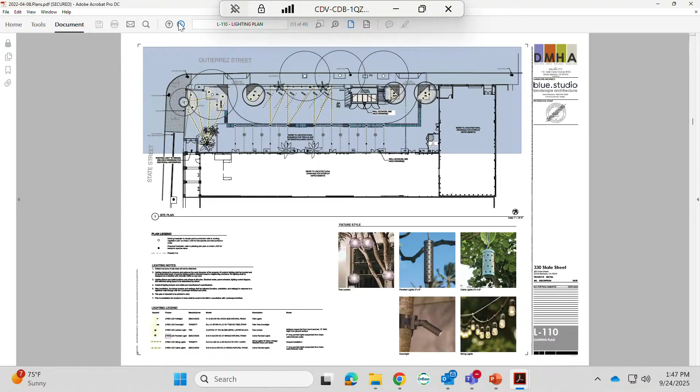I don't know where it is in the set exactly because it's not my set of plans. Keep going. Too bad. Keep mine going. Right here, I think. Let's see, I think there's a landscape plan, if I remember right. There is.

Go. There. This is probably helpful. Let me zoom in there. I don't have a pointer, do I? I don't have any way to. No, I have no control.

An arm wave, okay, over there and over there. I'll do this starting from right to left because that's how I talk about this project a lot. So the right side building where it L's north-south, that previous use was intended to be a music venue and concert, a small little concert hall. The gray area under the hand was the stage, and then the rest of it was just an open area.

Moving right to left, the space that has the red text in it was going to be a speakeasy. And then those other areas around them, surrounding them, are restrooms with the little circles in them. Those are restrooms there too. And then the whole left side of the building, the remaining part of the building, was intended to be one large restaurant.

Our uses are more or less the same, with the caveat that the restaurant space we've cut into a smaller restaurant and a small market. So other than that, we're not really doing a speakeasy, we're calling it a piano lounge, but it's still a bar use. And the music venue is still a music venue use. We just have flipped the stage around to the other side and done some other changes.

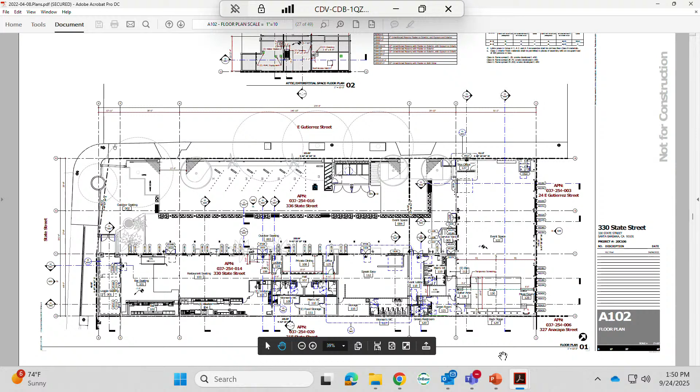Our approach to the project is very different in terms of site planning. The use of the building, doors and windows, and all that, we're making some mild changes to them, but for the most part, the uses haven't changed.

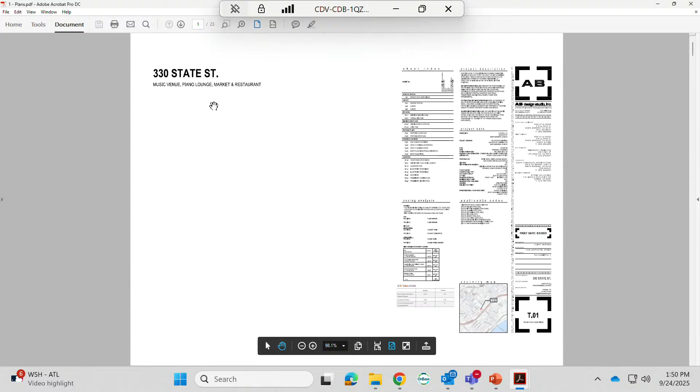Does that help? Yep, that helps a lot. Okay, perfect. We'll go to our presentation and jump in. So we can go to the next page, please.

The whole structure, the whole property is historic, but they're separate parcels. Our property is actually two separate parcels: one that holds the building and one that holds the parking lot, effectively. The tower's there. We're not doing anything with the tower, it's going to remain.

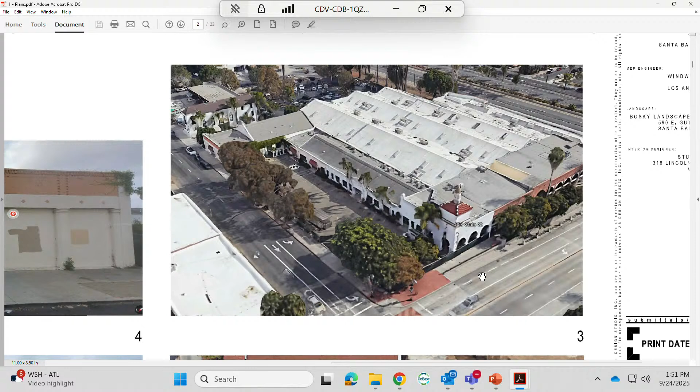The image in the middle, image number 4, is the facade along Gutierrez Street, and it looks like that today, pretty much. We've been working with Nicole quite a bit on trying to figure out what we can do with that facade, because we all know it needs to be improved. The program right behind it is the green room, the loading in and out for the shows, so it's more of a utility side of the building, but it's on the street front. Nicole and our team have been working to try to give it some more life. We'll see that in the elevations later.

So here's the middle of the building, if you will, the long facade. Those are all original steel windows that you're seeing. There's been some newer replacement things that have happened, especially under that gabled entrance that's been set back - that's not historic material, it's just sitting there today. But the windows to the right and left of it are all historic steel windows, which we intend to keep.

In some areas, we're removing a window and putting in a door or something like that, just to get in and out of the building for egress and other reasons.

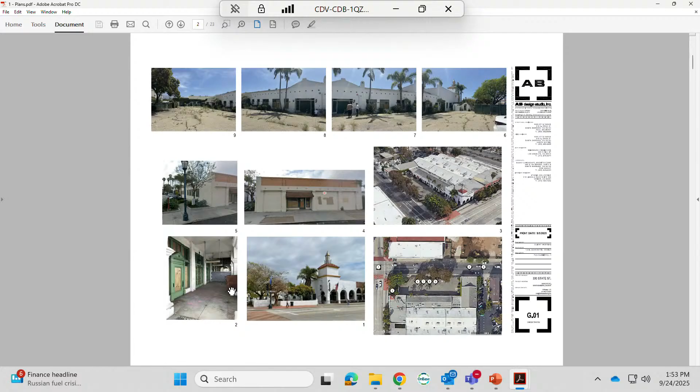Here's our proposed site plan. I'm not going to get into the site plan too much - I'm going to let Graham handle that. But the plan that we're starting with, which is why it's very different from the last go-around, is that we're removing all the parking and trying to create a park-like setting on the corner of State and Gutierrez. So remove the cars, let the building flow in and out, let there be space to sit around the site and enjoy things. Similar to how Dark Garden is in the Funk Zone is our sort of inspiration for it, although it doesn't look like Dark Garden. We'll let Graham come back and give us more detail on that.

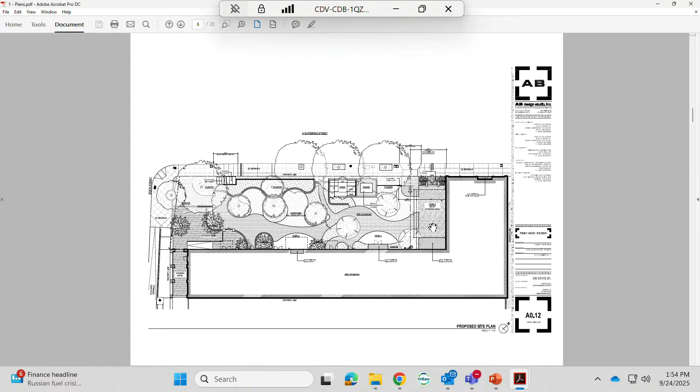It's really hard to do without being able to point, but in the corner of the L on the site plan, in the upper area where there's that gray area that says 228 square foot addition - that's the entrance or foyer for the music venue, and that's where we're doing a small addition. Next to that on the left is also a small addition to the building for the piano entry. They're sort of like control points, so that as people are coming in, they have people greeting them, controlling, and telling them where to go.

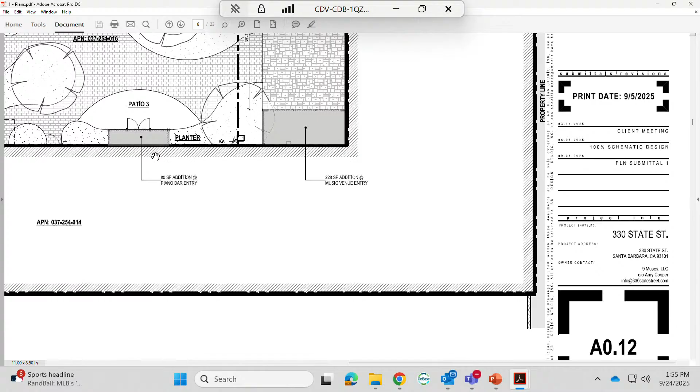If you slide to the left, there's a small addition where that image I showed you - that had the doors that had been changed out - has an alcove in it. We're pulling that back out. That's going to be the entrance to the market, and there'll be a little canopy above that, shown as a dash line. We'll see that on the elevations.

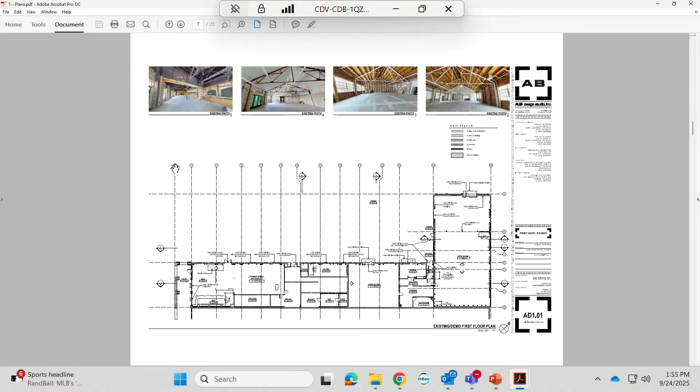I just wanted to point out those in plan.

If we zoom in that same area where the piano lounge is and that L - thanks. So there's the entry pop-out that we have on those two entry points to help control flow. We have a music venue specialist we're working with, and they've been giving us a lot of direction on these things.

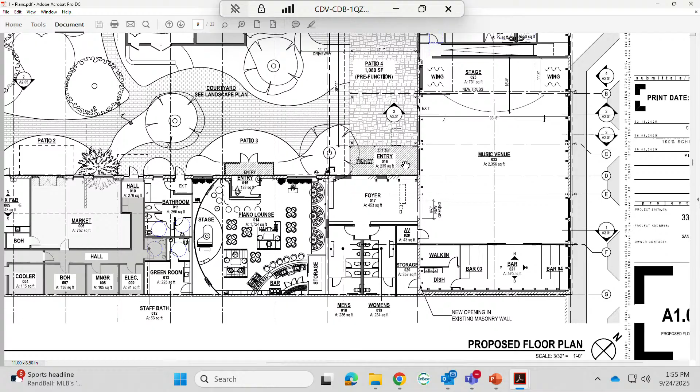Okay, so can we zoom into the left side elevations?

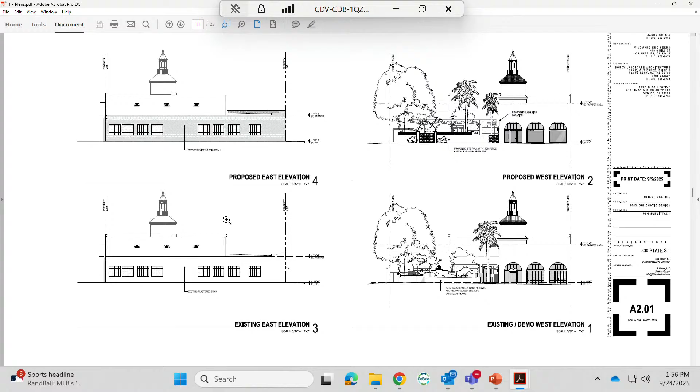So the elevation you're seeing is the elevation that faces the driveway that pulls into REI. Currently on the number 3 elevation, that whole wall is plastered, but when you get to REI at that break point, it's all been removed, the plaster's been removed. So we wanted to continue that and wrap it around the building where the music venue is.

So our proposal on this elevation is simply to remove the plaster and have exposed brick like REI is today. If we slide to the right, this is the State Street elevation, and the changes we're making, other than site changes, have to do with the window systems in the loggia on the lower right-hand side.

You can see the existing condition. That was done when they made the Casablanca restaurant, I think, or maybe earlier. I can't remember the date of the door change. Was that '37? Some of it, and then some later, for Casablanca. We have the photo from before those changes, and it's on the drawing set. He's going back to something more original.

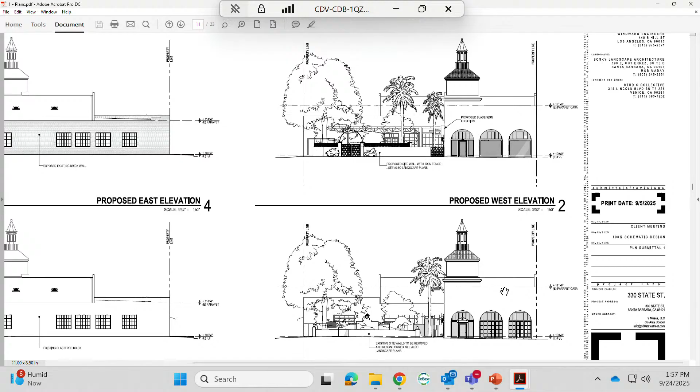Right, so if we can zoom out and go to the next page. If we zoom into the lower left image, number 3, this was the historic material on the building before they changed it in 1937, and then again with Casablanca. So we're kind of going back close to what was there, working with Nicole on this.

We're going to do a door and two side lights, but it's going to be on the left panel. And then we're going to have single pane glass panels on the middle and the right, which you can see on elevation 2 if you slide over and up. So that's the revision to that.

So that's working with Nicole on this. We're getting it closer to where it was pre-1937 changes and then before Casablanca came in. The interesting thing about this building, if you haven't been in it in a long time because it's been closed, is the front door is currently on the left panel, and there's a level change of about 15 inches.

So when you come in, there's a ramp. We're going to fill it in on the right side so that it'll all be one level in there. But the entry on the left makes a lot of sense because of the condition on the inside, which is why we didn't put the door back in the middle. Zoom out, please.

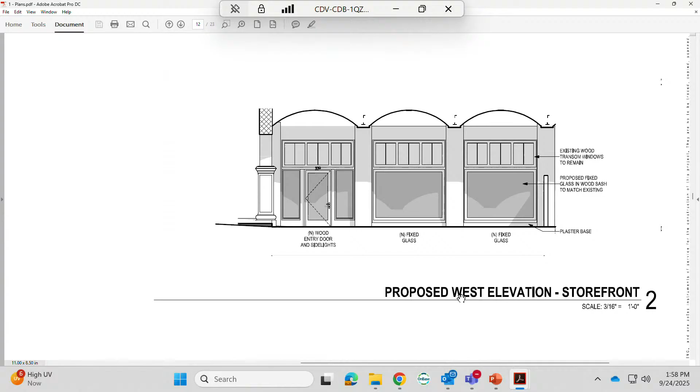Oh, the windows, the transom windows are all existing historic material that we're not changing as well. Next slide.

This is an exterior elevation, looking at the music venue from the parking lot, so it's the elevation facing west. On the lower existing elevation, from left to right, you're seeing a big roll-up door, a trash enclosure, some funky old wood doors that got put in at some point, and another screening element that screens a transformer.

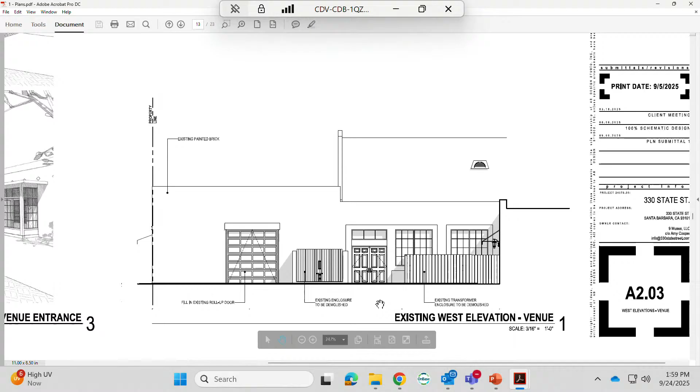We're relocating the trash enclosure, relocating the transformer, changing those bad, ugly doors out for steel doors, and we're going to infill that roll-up door that's sitting there. So if you can slide up, please.

One of the things we want to do is create a queuing space outside the music venue for in-between acts or before acts. We've been studying this area quite a bit, looking at wood trellises, steel, all kinds of things, and where we've landed is a light gauge, lightweight steel structure providing cover using a curved truss idea, with thin, maybe fluted steel columns—something very lightweight that provides shade and protection from the elements. From left to right, there are 2 bays there, and we've actually been studying making that smaller.

The doors are being changed out from wood to more steel doors that reflect what's currently on site. The pop out, that little entry vestibule, is a steel and glass enclosure. Our design concept has been that anything we're adding to or putting up against the building would not contradict it. It would be steel and lightweight, not heavy. When we studied wood trellises and wood elements, everything just got so massive really quickly.

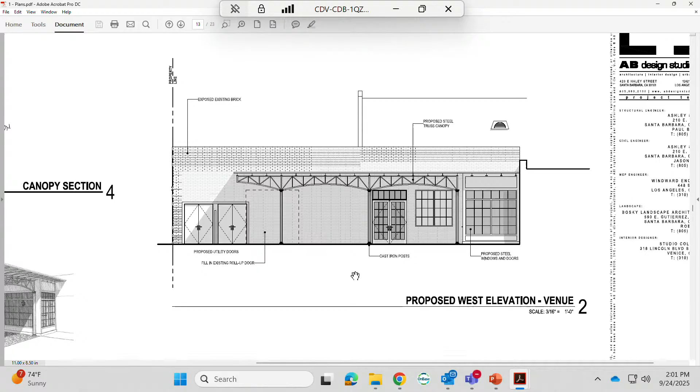If you slide to the left, we can see what that looks like in a 3D sketch. We're still developing the detailing on this, this is a concept, initial concept that we started with. You can see from image 3 the little pop out that we're doing again at the piano bar, right there where the cursor is. Again, lightweight steel glass, just intended to be something that says, hey, this is where you're going for this event, this is where you're going for that event.

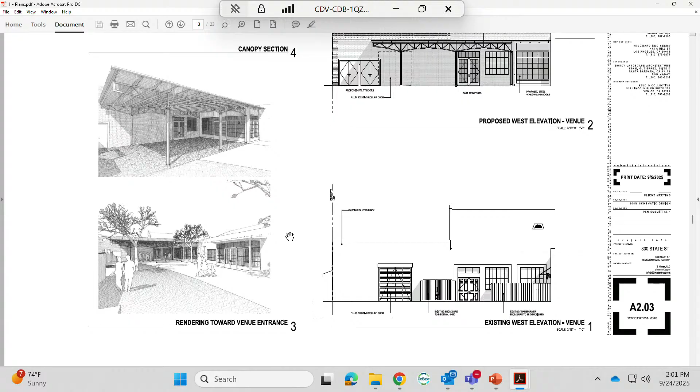Zoom out, please. We can go to the next page.

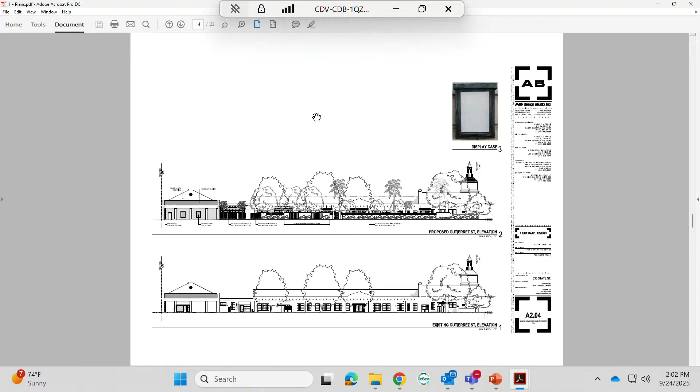These are hard to see, but if you can zoom in on the 2 elevations, this is the upper one is a Gutierrez Street elevation. Pardon my interruption to the applicant, I do have your updated elevation that you uploaded if you want me to bring that up. Is this the sheet? This is the old one. We made an update. This is it, okay, thank you for reminding me.

If we can zoom in on the 2 elevations, along Gutierrez Street the lower elevation is the existing condition. The upper elevation is showing the street elevation with site walls, doors, access points, trees. You can see on the left side of the upper elevation where we looked at a historic image that had a storefront similar to what we're showing here, but it was on the far right bay.

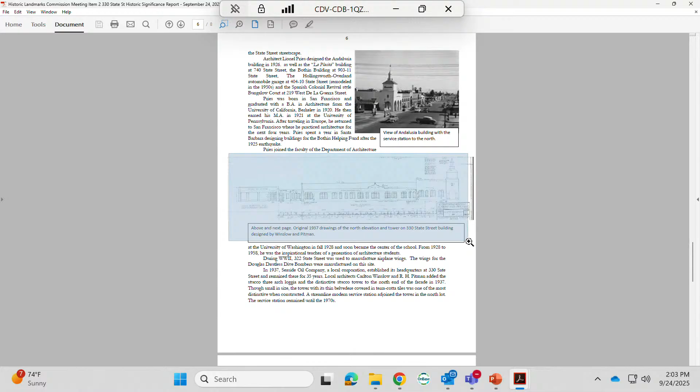Oh, you have it there. We have it on the significance report. A team effort here. So on the far left side, you can see there's 4 bays, and there's a doorway on the right bay. We've basically flipped it, so in our elevation that doorway location won't work for us programmatically, but we can do it on the left-hand side, add an awning, and then put some marquees in those other bays, kind of like the Granada, something similar to that. We've not yet designed them, but that's our thinking at the moment.

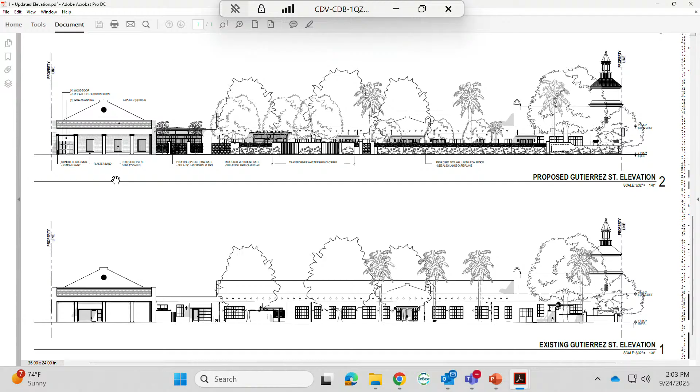If we can zoom out and go to the next slide. I'm almost done. Oh, you got to go back to the other set.

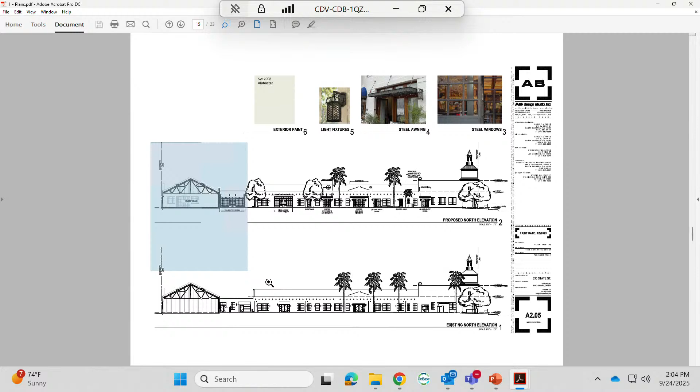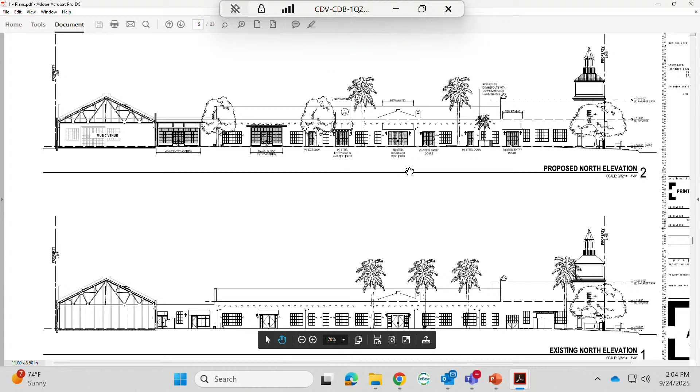If you can zoom into the 2 elevations real quick, I just want to point out, this is fairly easy to see, on the upper elevation, the proposed elevation, any window or door that's being changed is in gray. All the other ones in white are existing to remain. In some cases the gray ones are taking an old door that's not historic and putting a door back, like the one in the middle near the cursor. The existing elevation has a pair of doors and a side light on each side, but it's not historic material, so we're putting back steel doors and windows in that location. All the other doors and windows will remain. That's the side facing Gutierrez Street, but there's the parking lot or the garden in between there, right?

I think that's it for my part on the elevations. We'll go over to Graham on the landscaping.

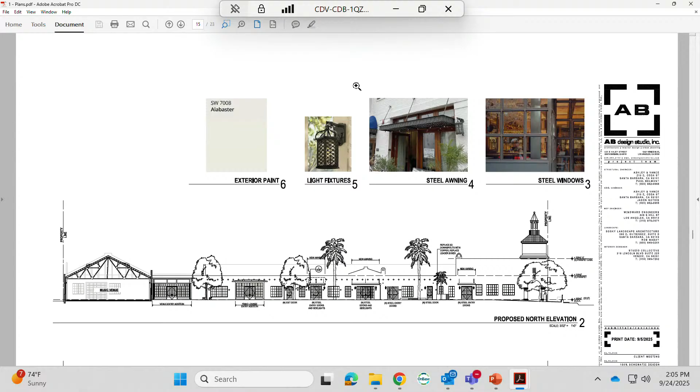Oh, I just wanted to point out up above on 3 and 4, those were kind of our inspiration items for the awnings. There's some awnings over the doors into some of these spaces, and item 3 is kind of like the steel window and steel kind of enclosure at those entry points, the design idea for that, something that looks like lightweight steel and glass. And then that's the Hotel Indigo.

We're looking at awnings like that over the market entry and a couple other entry points along the elevation. So I'll let you go, Graham.

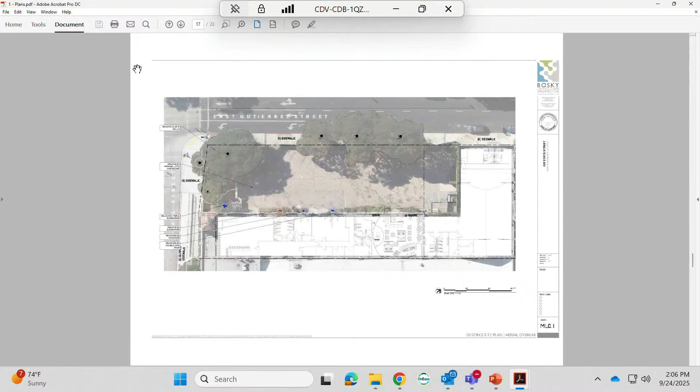Thanks. If we can push forward to the landscape sheets. As was alluded to, the driving design intent for the landscape was to convert what is currently a very large parking lot into a park-like environment to support the success of the proposed restaurant, market, and venue spaces.

We have carved out generous planting areas in undulous forms to create little alcoves for people to congregate and enjoy the offerings of the marketplace. Good spaces for bistro tables, seat walls, just for people to settle in and people watch.

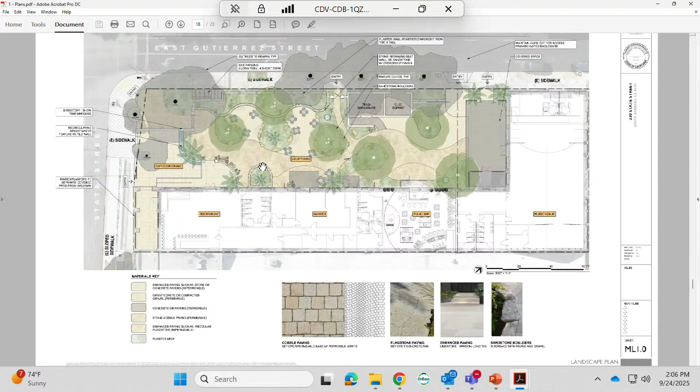Another strong driving force in this proposal was to reimagine the corner of State Street and Gutierrez, which currently walls off pedestrian access for those walking the main drag of State Street. So we've opened up this corner entirely to invite people in off the street, creating a portal between the two existing street trees that frame the view of the market within. Right now it's completely closed off, and we really want to bring people in.

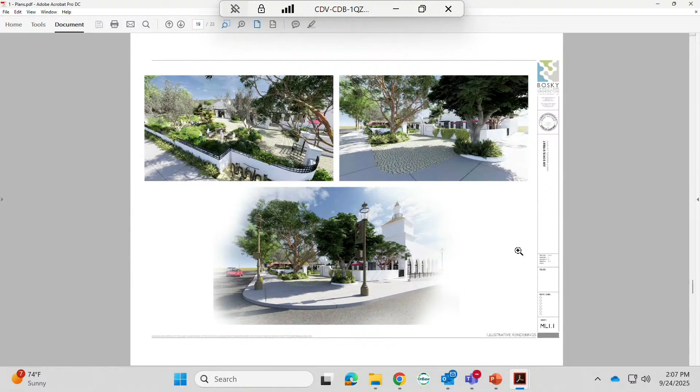One note on the upper left image: we're adding some bike parking. Even though we're not required to have it, we're adding bike parking along Gutierrez Street, which I think is a good amenity. You can see it in the bottom part of that image. So we carved out an area of that site wall to add in some bike parking.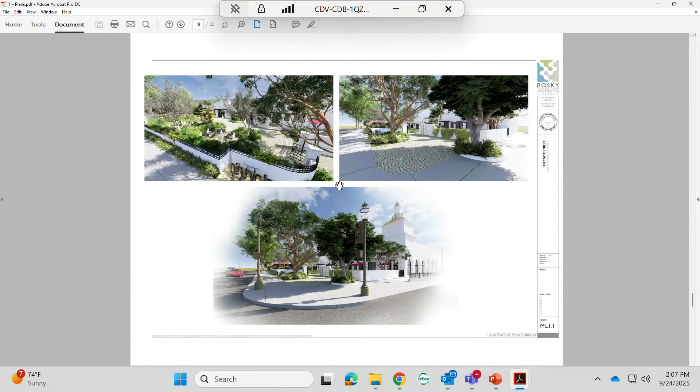Regarding material selection, we've tried to reinforce the character of Santa Barbara with white plaster site walls capped with a permeable wrought iron lattice that alludes to stacked terracotta roofing tile, Santa Barbara sandstone boulders within planting areas, and sandstone-clad seat walls, also proposed to reinforce that native Santa Barbara character. We're currently still exploring paving materials and working closely with creeks to best balance stormwater requirements with our desire for a natural paving material.

The current placeholders in this plan are cobble setts that create a ribbon throughout the entire project, drawing people in off State Street. That ribbon departs in the alcove spaces, which will either be a natural-looking granite-crete material or a permeable gravel paving, to loosen the sense of formality and reinforce a park-like feeling. Within the outdoor dining and outside the venue space, shown on the bottom image, we'd like to use enhanced paving of either limestone or a natural-looking paver.

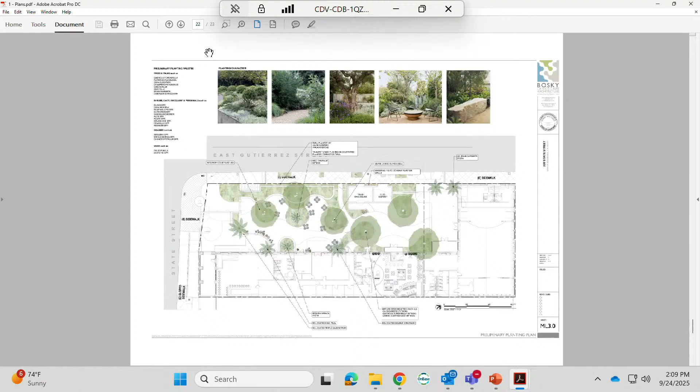Planting material would likely consist of a mixed Mediterranean character, importing several mature trees and palms to complement the existing mature trees. We're also proposing relocating some existing palms on site for immediate scale and an immediate garden feel.

Landscape lighting is intended to create a pedestrian-safe walking surface with in-grade horizontal washes, as well as a charming night scene with several lanterns and hanging pendant lights within the mature tree canopy. You can see a mixture of hanging fixtures we'd like to use. Again, these are just placeholders, but you can get a sense of the character we're after. I think that's about it, and we're open to any questions.

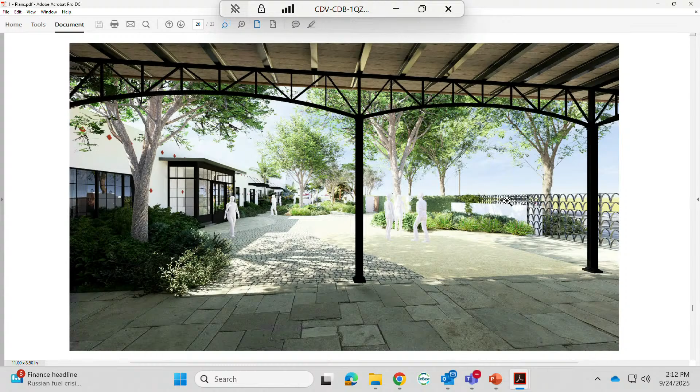Is there a different image that looks like terracotta in section? Yeah, I'm intrigued to see. Oh, there we go. Okay, so you're referring to that. What's the steel support going to be covered with? Steel roof. Okay, thank you.

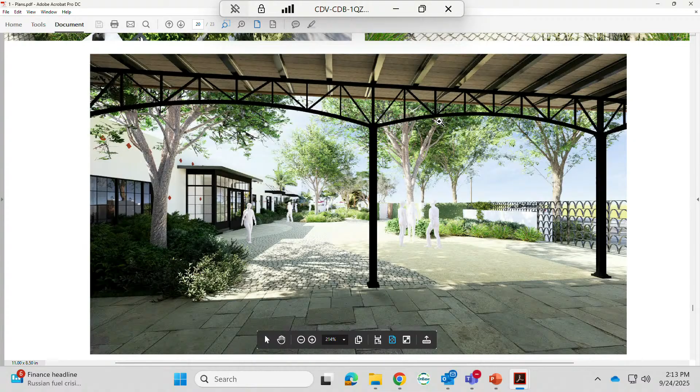I mean, like it's the top of a bar, right? Wait, sorry, two different things. Which element are you talking about? The bottom image, what is that? What's the cover roofing on that? Got it, okay, steel roof canopy. I was mistaking it for something else. Okay, yeah, it would be steel, metal roofing. And like a standing seam on top, or? Probably more of a flat seam, but yeah, interlocking.

Mr. Chair, I have one more question. Yep, sure. Will the steel be made out of solid stock? What we're looking at, for the structure of it or for the roof material? For those scallops in that wall? Oh, that's the intention, yes. Yeah, thank you.

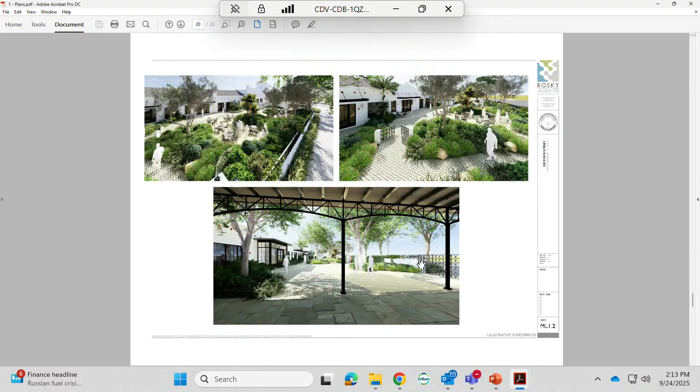All right, other questions? Yes, Commissioner Lemnick. The images you show of the landscaping show a relatively mature, full landscape. When will that occur? So field dug olives will give immediate scale, and it would look exactly like that on day one in terms of the tree material. And then also field dug palms, I believe, also relocated existing palms that are very mature, so the canopy would be very, very similar to what you see.

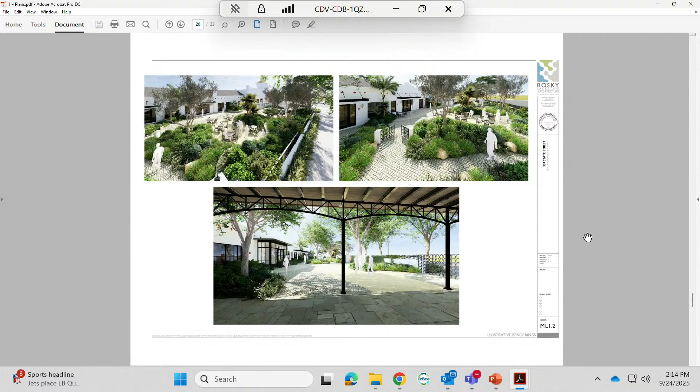I would guess probably a year to get full growth on certain of the shrubs, and two years for some other perennials. So you have a lot of lower plant materials shown. Correct. And will they fill out in that manner that you've shown quickly? The intent is to get as large specimens as can be afforded. And you're only going to have dirt, you're not going to put down rock or gravel or anything else in there? It won't be gravel mulch, it'll be like an ES2 Agromin natural mulch to help fertilize this over the long term. Okay, that's all I have.

Any other questions? Yes, Commissioner Ginsburg. Thank you. Yeah, I do have a few questions. So the cars, there's no cars - they're going to park across the street or wherever else, is that the idea? Yeah, so we have a city lot across State Street, and we've been also discussing a deal with REI to use their lot at night when we have events. Okay. And then the steel windows, are they the color like you were showing, or dark? Yes, dark gray or black.

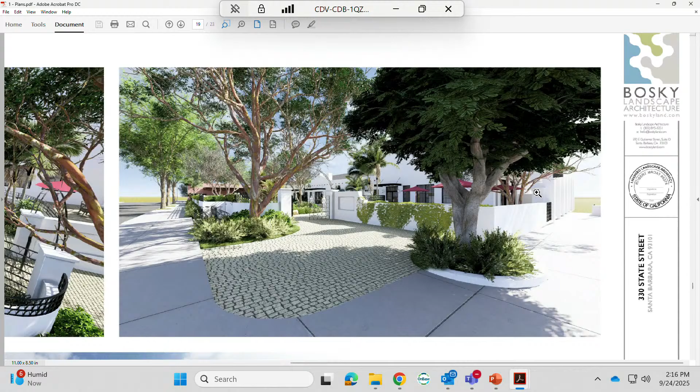And then the park - you said how you're welcoming the public in. So would it be, I mean, I see you have it fenced around, but you have the gates there between the two trees as you described. Can you zoom into between the two trees? Yeah, could you zoom in onto the top right? So will it be open to the public to use? Fair question, I'll help answer that.

We have several things that we need to deal with. ABC is one, so we need some enclosures for alcohol consumption. We also have the desire of the owner and management group to be able to close the site off for security reasons at night, and also to do buyout events if somebody was to take the whole property for a wedding, anniversary, or whatever.

So, yeah, we've strategically designed an enclosure around the property that we think is also inviting and brings people in, but has the ability to be controlled if you need it to be.

So that gets to my next question. You have the restaurant in the front, then the market, then the piano bar, and then the venue. Can you talk about that, and you have the park too? It's like New York City - not in a bad way, but you have this nice park that the public can use, and they could come in, go into the market, or just want to sit out there, used for a variety of things during the day. So could you talk more about how you're imagining all these elements, how they work together, and your approach and thinking about that?

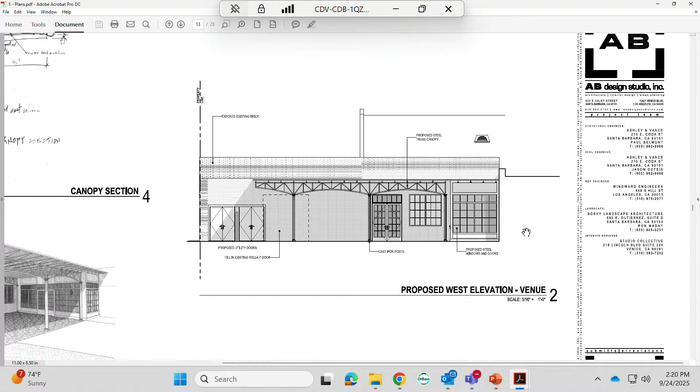No, I just was wondering what that was, I was just trying to... they had a little extra steel. Those are all my questions, thank you. Sure, all right - it's a buttress, I don't know.

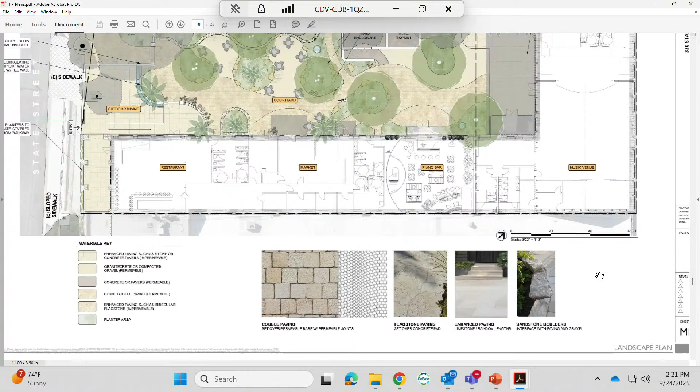So I get the explanation of the materials being Santa Barbara palette, and I think that makes sense, and where you're going with a lot of these materials and the look. What I'm trying to wrestle with is your geometry. You've got a lot of sort of swirling - in plan you see it more than in others, but in the elevations and perspective too. In plan, you've got a lot of amoeba shapes and winding pathway-ish things. I guess my question is...

How is the geometry of this - what examples can you think of in Santa Barbara that are this type of geometry when it comes to a garden, a plaza, or a park? How does that being inspired by Santa Barbara?

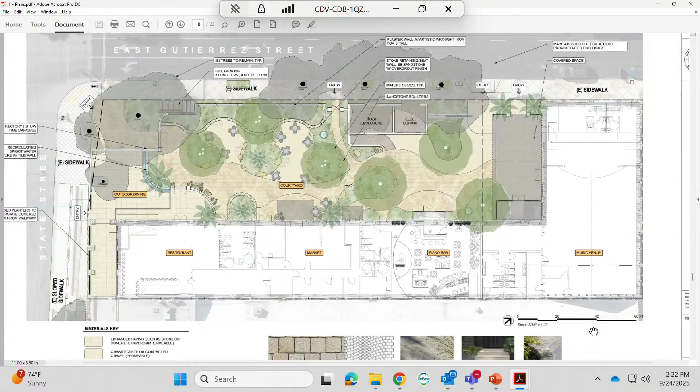Yeah, I think the inspiration largely would be the materiality itself, reading as this warm Santa Barbara sandstone tone that complements the Santa Barbara sandstone itself, as well as a Hanley gold gravel paving for these dining alcoves. We really wanted to reinforce this idea of an inviting ribbon that carries you through, and that's the genesis of this curvaceous form.

Okay, all right. Any other questions before we go? A comment here, because I had the same question - it reminds me, this might be stretching a little bit, of Alice Keck Park Memorial Gardens. I couldn't remember the name, but that's the closest I could think of. I was thinking of that too, but couldn't remember the name.

All right, great. Any other questions before we go into comments? Okay, so why don't we roll into comments. I do want to read or bring up Commissioner McClure's comments so we can read them and discuss as we go forward. He's obviously not here for a vote, but he is our landscape architect, and he was gracious enough to send some comments after reviewing the plans and the design.

Bear with me, I should have prepared these before. No worries. Well, we can start off with our own comments as we go as well. Who would like to jump in? Does anyone want to start off?

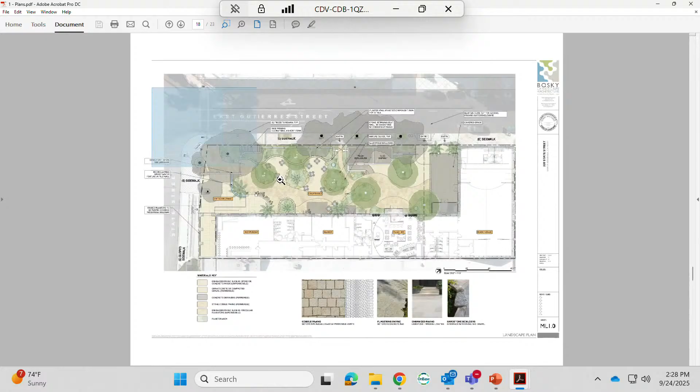There's a seat wall along the top plan, those curving ones, right? Yeah, there's boulders along there. The boulders are in the planters, actually. I'd rather see something curvilinear that you could actually enjoy the curvilinear aspect of it, without boulders, if they're in the planter. If the boulders are small, of course, if they get too small, they become rocks, right? So it's either that or gravel ultimately.

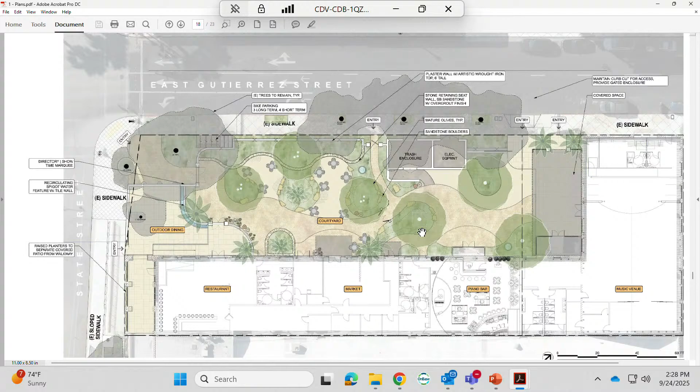But anyway, I think it's a very good project. I appreciate the work, and I'm a supporter. Thank you. All right, let's go to Commissioner McClure's comments, and then we'll go to Commissioner Lundvik.

Okay, so this was regarding this: the exterior courtyard design is not coherent. It's not compatible with EPV guidelines, not in any way historic. It looks fragmented, lacks function and purpose as seen without explanation. The entry walk on Gutierrez Street seems very narrow for a commercial project. The design of the exterior should be more formal. If change of tenancy changes, does the courtyard offer flexibility?

I think you've answered some of that, but we can talk more. Too much curvy swirling of walks that fatten and become narrow, same for planting areas. It seems to lack clear intent. Enclosing the transformer is appreciated. The lighting seems interesting, but it may be too much lighting for EPV. I would like others to review the landscape lighting plan and assess if this meshes with the EPV guidelines. Many types of fixtures, and the quantity of light sources seems excessive.

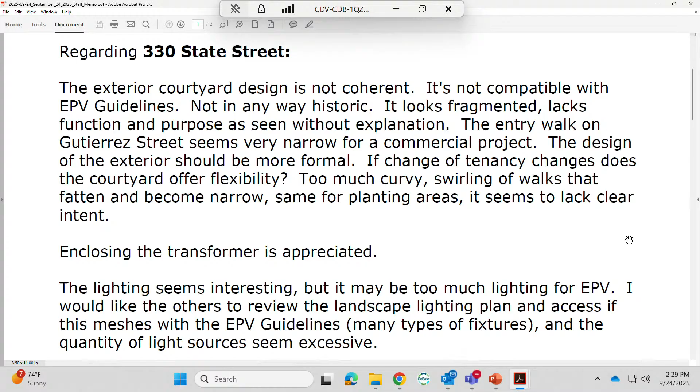All right, that was Commissioner McClure. It's unclear what he was really thinking. Now, I think some of the comments have been made, and I want to give you a chance to also respond to one, which is more of a question: if change in tenancy changes, does the courtyard offer flexibility, or is it going to be too locked in?

It's not locked in enough. If something changes on there, it's very flexible in that way. Okay, and then the light fixture, light number and fixture discussion—I know you show a lot on your spec sheets. Do you want to just walk us through that, where things are, down lights from the trees, things like that? Because you have a wide variety there, obviously.

Yeah, I think we were basically advocating for a very charming hanging pendant character. So we're bringing that in—actually we can jump from here to the Barloo in Montecito. Yeah, exactly, that was the inspiration, was Barloo. We love those hanging pendant lights, the rondelle lights. We find them incredibly charming. That's the third fixture there.

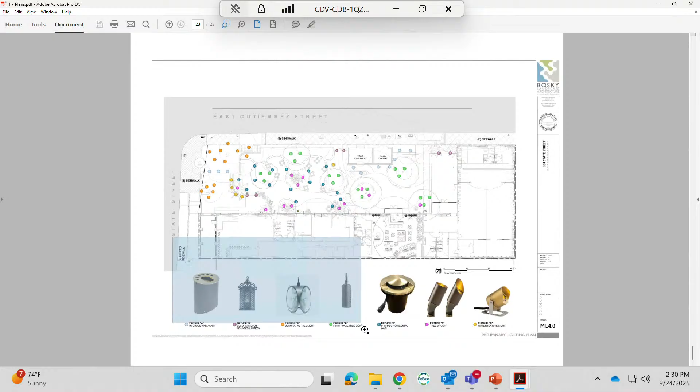So we wanted kind of a fairy tale entry along Gutierrez and State Street to really draw people in during the nightlife. And then the D fixture is kind of like a glowing lantern, a more soft light on the interior of the park itself, hanging from the new field dug olives and the other tertiary trees.

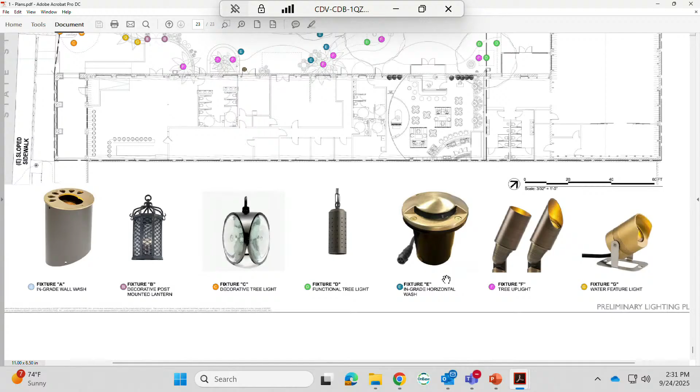The in-grade washes are just to promote a safe, accessible walk, throwing light on the ground. And then some very modest uplights just to improve the character of these really majestic new trees that we would be bringing in.

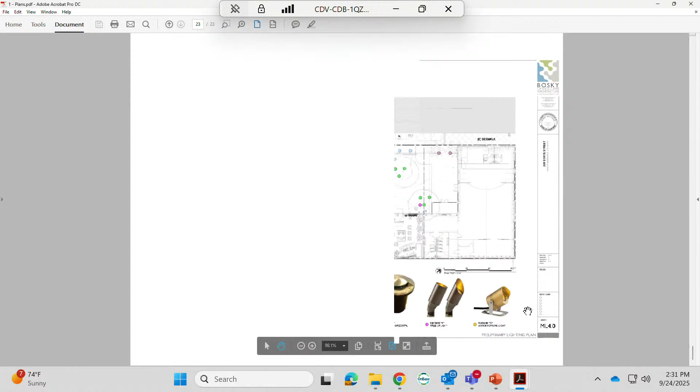My comments probably are slightly different than the prior comments made. I think that the paving material, particularly as you enter from Gutierrez and State Street, being that beige brick, is not Santa Barbara. Santa Barbara is more of a mission tile walkway, and we've introduced a lot of brick color into our walkways, so something more in keeping with that character of established materials downtown would be a better solution as you enter into the project from the corner.

You might want to continue to use your cobbled paving throughout the rest of the project, but I would think a darker or different color would be better. I can see this project after about six months where guacamole, catsup, and every other thing is walked into the paving material, and it will be difficult to keep looking clean when it's that light a paver on the ground. You may be happier with a darker paver, like brick or whatever, from the standpoint of appearance, but I do object to the light paving as you come in off the corner, and other entries as you come to the wall line or whatever.

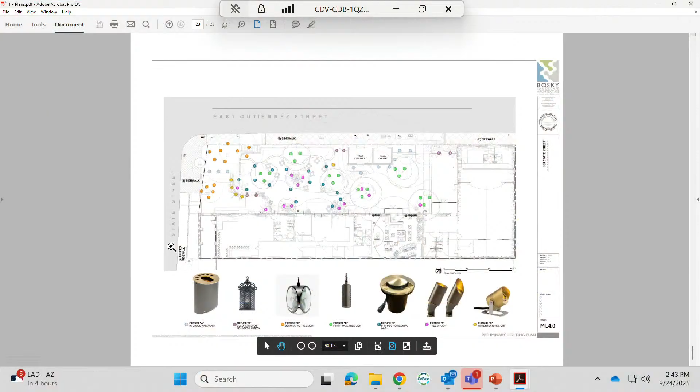It's in the landscape, the second one on the left. That's wrought iron. Yes. It's a hanging one, is that the second one? Where is that, fixture B? That one, decorative post mounted, it's on top of the pillars at the entry of the road. Okay, gotcha.

Well, so this to me is more filigree and more ornamental, which is kind of the opposite of what I'm thinking of these trusses, which is more industrial. So I think we should be clear about that, and I lean more toward the industrial side, and I would simplify that fixture and make it more plain. Not that I don't love Baroque, I do, but for this building and the direction they're going, with the steel windows and all of that, that ties in better.

So I just wanted to make that point. I want to check the location on that. Can you hover over it? Yeah, there, at the entry of the restaurant and the venue. So that's on the plaster wall with the wrought iron scallops, and these are on top of the pillars at the entry, and then they sit on.

Gotcha, it feels Moroccan or something. The intent is, and I agree with you, to have like a microcosmic version of the scalloped steel kind of reference. I agree with you, that's very ornate.

So, if we have a consensus, we can. I think there's got to be a balance between EPV, Spanish Colonial Revival, and the industrialness of it. Yes, and I think striking that balance could probably be done a couple of ways. Why don't we just give them this comment, just so you know there is this fine line, and it's probably somewhere in between that will be the sweet spot.

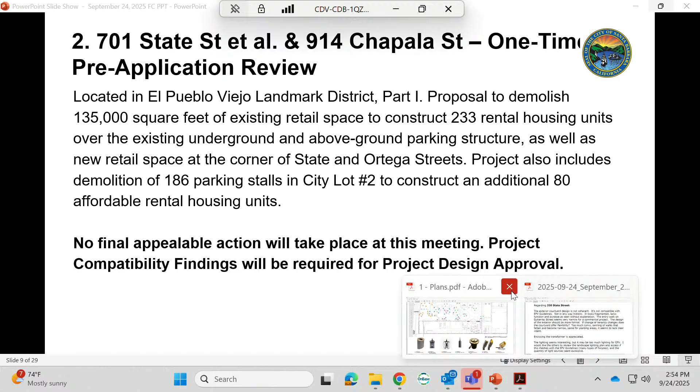On to item 2. This is a one-time pre-application review for 701 State Street et al. and 914 Chapala Street, located in EPV. The proposal is to demolish 135,000 square feet of existing retail space to construct 233 rental housing units over the existing underground and above-ground parking structure, as well as new retail space at the corner of State Street and Ortega Streets. The project also includes demolition of 186 parking stalls in City Lot 2 to construct an additional 80 affordable rental housing units. No final appealable action will take place at this meeting. Project compatibility findings will be required for project design approval, and that is it.

All right, so welcome. If you wouldn't mind introducing yourselves from that side of the table. Sure thing. Good afternoon, Commission members.

My name is Kelly McAdoo. I'm the City Administrator, and because of the unique nature of this project, we're kicking off and introducing and giving the context for it, but then the architectural team will come up and do that part of the presentation. So I'll let...

Okay, yes, thank you, introduce yourself on the record. Sarah Knecht, City Attorney. Thank you, great, okay.

And I want to just, we have a large team behind us, let me see if I can get everyone. So we do have Tess Harris, who's our State Street Master Planner, working on the project. Dan Hentschke, Assistant City Attorney. Graham Lyons from Mullen & Henzell, who is representing AB, the developer or applicant in this case. Duncan Patterson with Gensler Architects, and Clay Arell with AB Design Studio. And then Allison DeBusk in the back, who is also supporting this project.

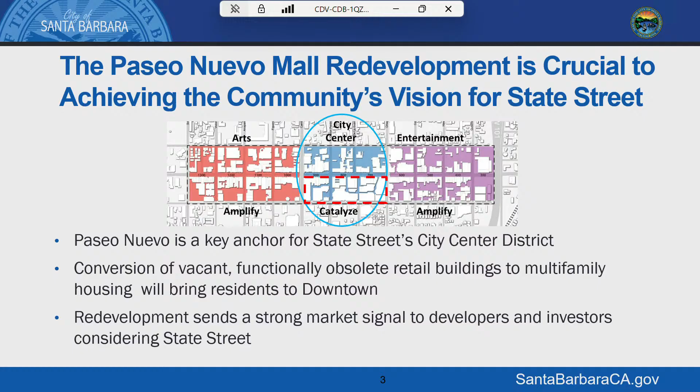And so this is a partnership project between the developer and the city, given some of the unique ownership structures. So, next slide.

So this project was actually developed in 1989 with the former redevelopment agency of the city. At that time, that property was owned by the redevelopment agency, and they were able to sign a 75-year ground lease. When, in 2011, redevelopment agencies around the state of California were dissolved, those ground leases were then transferred to the city for management.

The challenge now is that the city's charter has a restriction of 50-year leases. The redevelopment agency was not subject to that same lease restriction, and so the Paseo Nuevo leases only have a 40-year term left on them. And while we own the land under the mall, the ground leases assign all of the ownership rights, the possessory interest, the development to the lessees.

And so the uses in the mall and also the parking in downtown at lots 1, 2, and 10 are controlled through what's called the reciprocal easement agreement. That is a tri-party agreement between the city, the owners of Paseo Nuevo, and the owners of the former Nordstrom building. Next slide.

So how did we get where we are? The Macy's building and the mall shops are now controlled by a subsidiary of Alliance Bernstein. Alliance Bernstein is actually not a developer, they are a global investment management firm. How they got involved in this project: they had lent money to the prior owner of the mall, and there was a default on that loan, so now AB owns the asset.

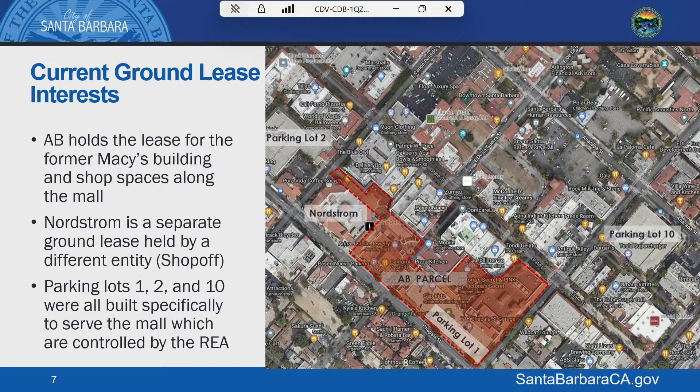So again, the 40 years remaining on the ground lease is really insufficient time to amortize an investment required to redevelop the site. And so we cannot extend the leases with AB per the city's charter. So we are looking at a way that we can partner together to redevelop the sites. Next slide.

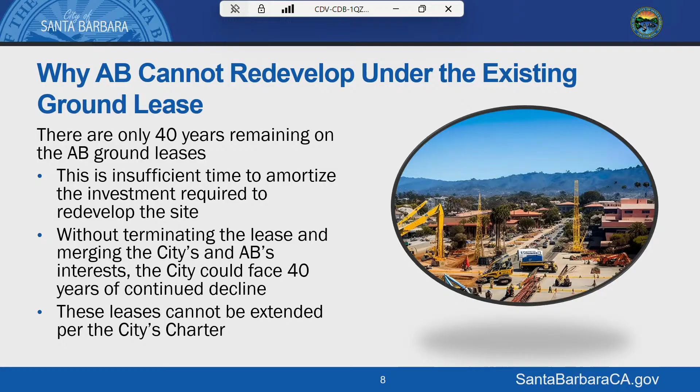AB originally came forward with a March 2024 proposal, and when they began to look at that and actually get into the architectural drawings and engineering work that was needed, it really was not going to be financially feasible because they'd have to take down the entire site and then rebuild a new sort of foundation over the parking garage, which would have made it cost prohibitive to build the basically 500 unit project that they had originally come forward with.

So in August, we went back to council with a proposed development plan, revised, that includes 233 market rate units built solely on the Macy's building site, so tear down of the Macy's building site and a rebuild there. Affordable units, they are looking at building 80 units in partnership with the Housing Authority or another affordable housing developer, and that would be constructed on a portion of Lot 2. We can talk more about that as we go through some of the schematics.

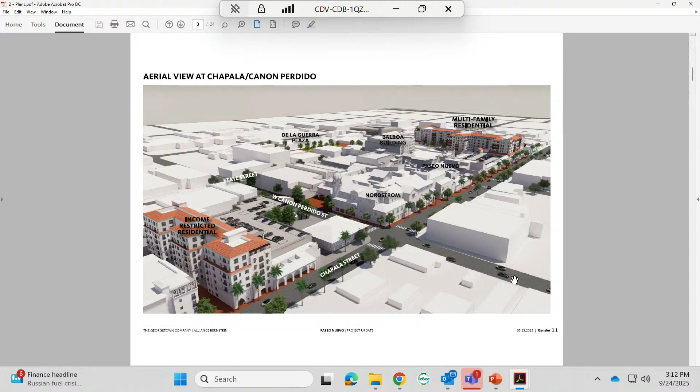So here we are from the other direction, again with Chapala in the foreground. You see the income restricted residential near the Canary Hotel at the lower left of this image. Moving forward, you see the Nordstrom, Paseo Nuevo proper, the core of it all, the Balboa building, and our multifamily residential, which runs the length of Ortega Avenue.

Next. This is an important diagram because on the mall site proper, the colored portions in yellow, those blocks, and our new multifamily, is the area that our client controls. Everything that's not colored, the Balboa building, even that small piece that's part of the mall close to the Ortega Street corner, all are by other owners. So we are focusing solely on what you see in color here.

And then Lot 2, of course, we are altering the parking structure to accommodate and build the market housing at that end. Next.

Public spaces come first. If we don't revitalize the entire site and treat this as one completely immersive project, we're not going to do our best job. It's important to us to reposition the Paseo spaces in a way that's friendly to new retailers, and to create an amenity that's a walkable community in downtown Santa Barbara with 313 units coming into play. This will stimulate pedestrian activity, the ability to walk and stroll on State Street, Chapala, and all of downtown, the historic district. So these images talk about where we're looking and what we're looking to do with the public spaces.

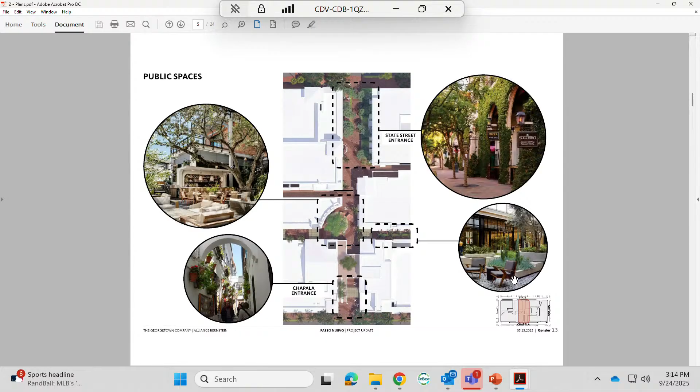By putting these many units on the site and the grocer at the top corner at Ortega and State, we feel that we're going to stimulate a lot of pedestrian activity in the area. Next.

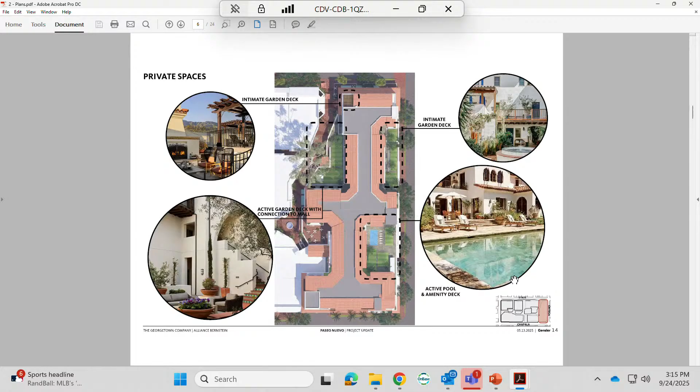We've also taken care to replace some of the architectural ornament on the outside that's not necessarily effective right now. We believe good landscape treatment along the new facades along the street is really important.

The functioning of the project as a whole does not change curb cuts and ingress and egress into the parking structures at all. There is one drop-off on Ortega, which is where you will come into the main lobby at the center of Ortega Street to get to the market rate units. There will also be, because of the size of the Macy's and the requirements of a grocer, an allowance for some internalized parking in there that's additional to what's built - not the subterranean parking - that's really necessary to get a market to thrive in this environment.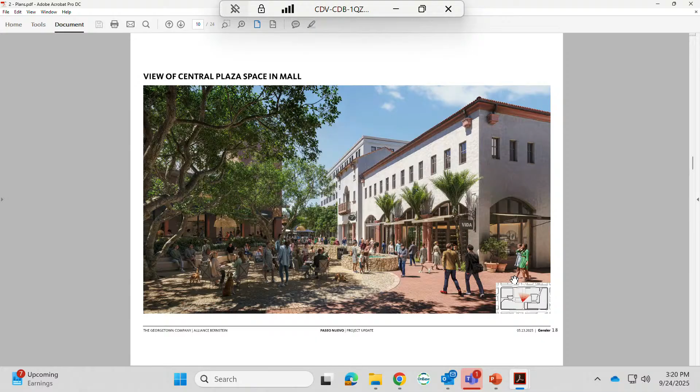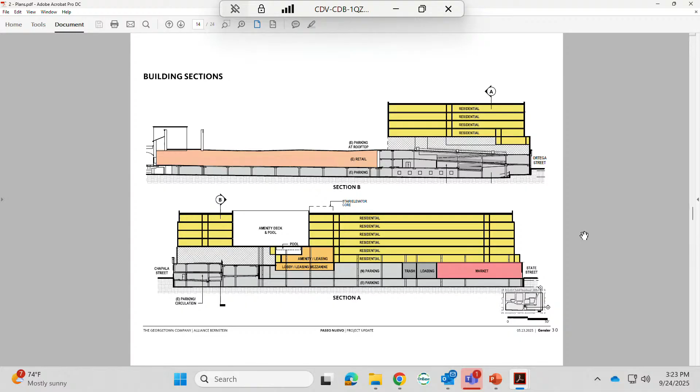These are more sections through, so these are almost a little hard to get, but what you see on the top one in particular is how we are building over and around the existing parking ramps that are on the Ortega and Chapala corner. This is a bit of a challenge, but economically it really helps us make the project workable, and it functions quite nicely. So we can divide and segregate pure residential parking that has immediate access to units from public parking for the retail.

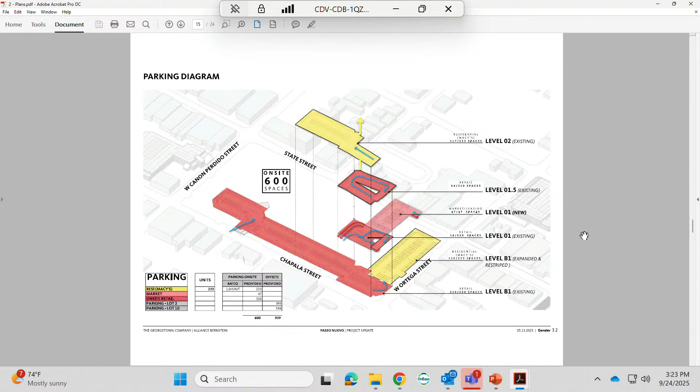This is a diagram that's a little challenging to understand, but essentially it's how we have broken down the types of parking. The red parking is essentially for the public, and the yellow parking spaces — this is an exploded diagram — show where the parking that's reserved for residential is in the project.

I think there is the other deck with the long elevation on State Street that I'd like to go to.

I think that's our general overview.

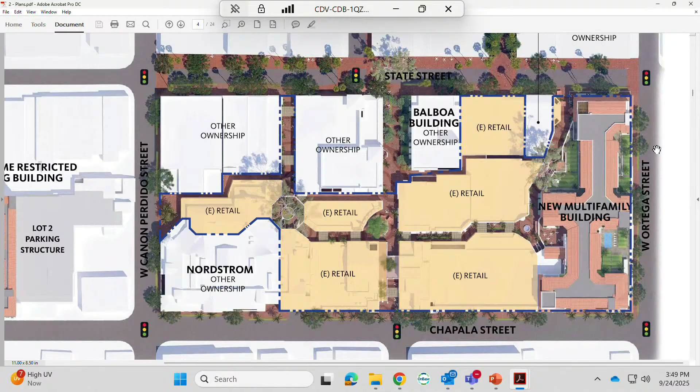Okay, all right, and then I had one question about the height. So can you go to your street section on State Street? I just want to confirm something, because I saw with the numbers that you gave of the height on your spreadsheet, or your graph grid, I believe you had the Balboa building on there as a number, and I thought that your number in total was taller.

It was like 75 feet versus 66 or something for the Balboa building. But then your...

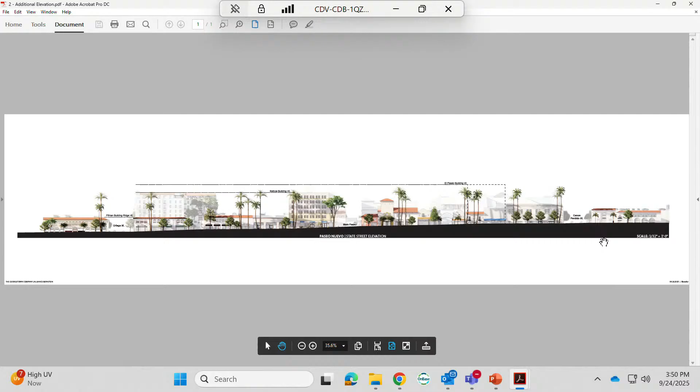Street section diagram, I just want to confirm, can you zoom into the Balboa building and that area there? And then, so what you're saying is it's not taller than the Balboa building because it's downhill.

Just a little bit of slope down, yes. And we've used the standards of measurement for height from the average of the entire site for our height that we've listed.

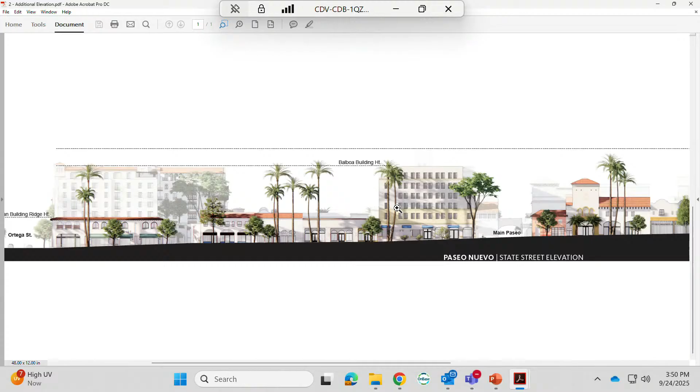That's why you see that one number, and then you see here what its height is parallel to Balboa. So where is what is the 75-foot number then? So is it basically your end corner at the top from there? Okay. Correct.

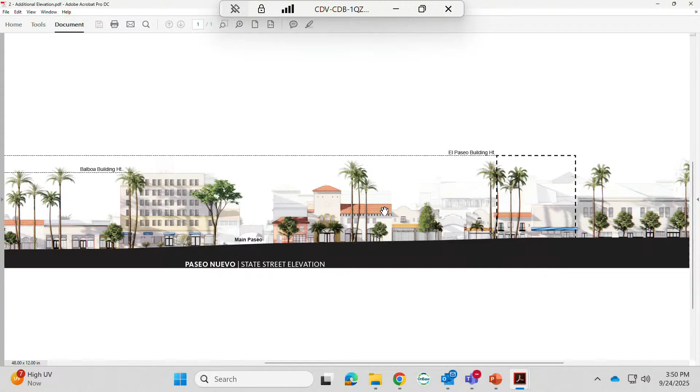Okay, and then so from the other end of it might be like 66, which is keeping it to being about correct. Yes, the site slopes in both directions. Okay, gotcha. Just want to make sure I'm understanding how the height issues are.

All right, any other questions? All right, okay, so let's roll into comments.

Mr. Chair. Yes, Commissioner Jordan. I have two comments, one's very short, one's much longer. The short one is, I really appreciated the presentation about the disposition and development agreement. This is a complex project, and I think the city will need to explain it over and over again, but I very much appreciated that explanation.

That's the short one. The longer one deals with the architectural issues. I want to start off by saying that people often think historic preservation is about looking in the rearview mirror, that it's about trying to hold on to the past. That's not right, that's flawed. Historic preservation in Santa Barbara has been an important part of how this community manages change, at least until Sacramento started to say we don't have the right to do that.

So as I review this vision of Paseo Nuevo, and I try to look ahead, try to imagine how Santa Barbara would look in 10 or 12 years from now, when there's no longer a housing crisis, when we're all riding bicycles or taking buses using public transit, and the downtown parking lots have all been redeveloped into 7 or 8 story housing blocks. Looking ahead rather than in the rearview mirror, I know what I don't want to see.

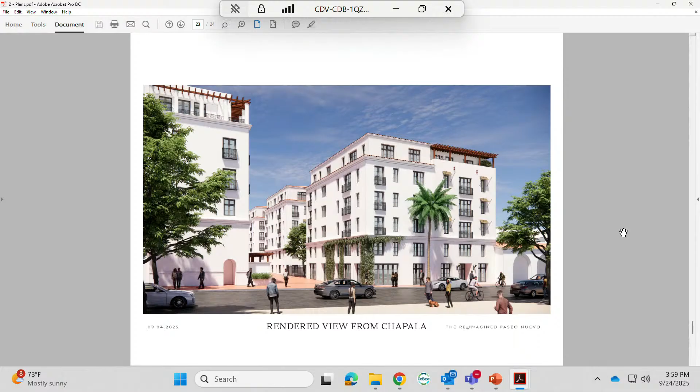Thank you. So, Commissioner Lenvick: we see a little corner of the Canary there, and I don't know that the Canary is any more downscale, dollar-wise, than any other hotel in Santa Barbara, and I don't think it's any more downscale than this image we see for the affordable housing. I don't have a problem with a large building being simple and not having a lot of ins and outs and so on and so forth. I think if we can landscape it and make sure we got human scale on the ground floor, those things are important. And I don't have a problem with this building in the direction it's going in.

We don't see the east elevation, and that's the problem. We see the south elevation and a little bit of the west elevation, where you've got a lot of ins and outs. On the main building, the main hotel building, there's a lot of ins and outs on the third, fourth floor, or whatever, on Ortega Street. I think it looks quite good. Sorry, I want to make sure we're looking at your residential, not the main hotel - no, main residential, just residential. Pardon me. We don't know they're going to convert it yet.

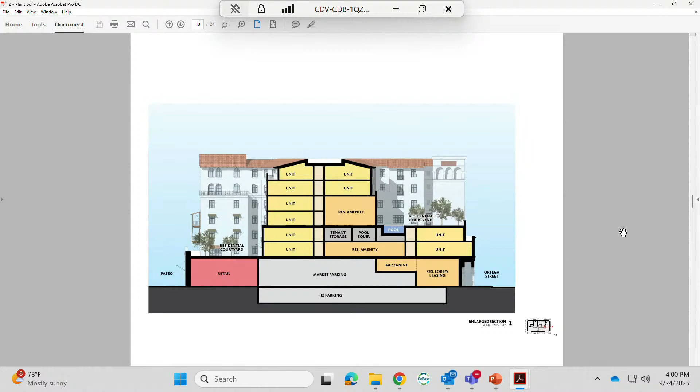But that view, or the other one with the other corner of Chapala? Or if you look at the site plan, the building plan, or the aerial, you see that the Ortega Street elevation has got a lot of recessed areas back in. There's a lot of relief on that elevation. I don't know that putting a wooden Monterey Revival style balcony on the corner does anything for you. I don't see it as an addition, I see it as a detraction, actually, to the architecture. Again, I don't have a problem with that elevation.

Yeah, I think the middle portion is the Mirador. I don't have a problem with not having that Mirador there. I think you can find another way to break up the height of that corner, but this is downtown Santa Barbara, the future of downtown Santa Barbara, and it's going to be 4, 5, 6-story buildings at the State Street area, and we don't have a problem with that.

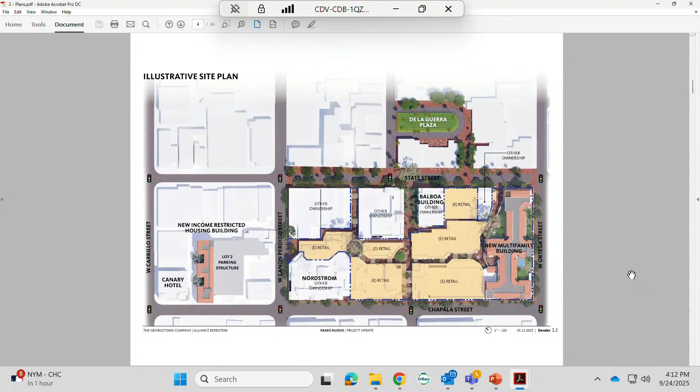All right, I'm going to take a shot at a comment because it's tied to the earlier comments and a lot of the other discussion too. Could you go to the aerial? It's specifically about the mass, bulk, scale, size question, and also still making it viable as a project without losing units. Can you zoom into the main building there?

So my thought on it, a couple thoughts. One is just the question of where does Santa Barbara want to go, at least as an ideal, where does the city want to be? And when you look around this room, you can see drawings of some pretty big buildings—not this big, but pretty big—as the original vision for where Santa Barbara was wanting to go.

The Balboa building is very interesting because it's built right before the earthquake. In the 3 sets of drawings leading up to it, you see it keeps getting a story added and getting a little bit more Mediterranean. It used to have a little parapet tile roof around it as well that got removed in the 50s or 60s.

It tells the story in my mind, and I've used it as an example, of where Santa Barbara, at least a certain amount of it, was trying to go—taller, larger, and more Mediterranean. It started in the early 20s, like 1921, when they first started designing it, Soule, Murphy & Hastings. So I think it's a very interesting tell as to where a number of architects and developments were trying to go.

And then in combination with that was also El Paseo, as an early starting block for how to do paseos and how to do inner block Santa Barbara.

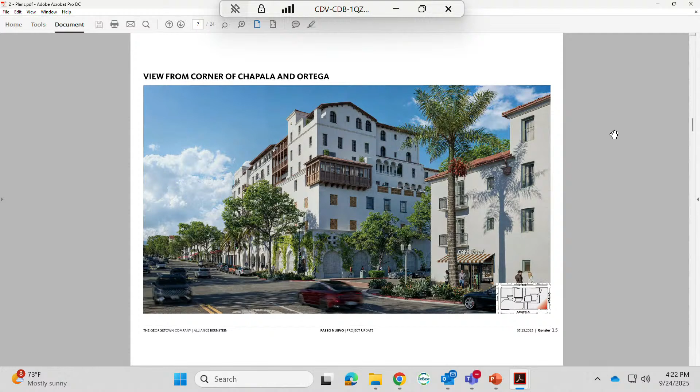I hope that our future will be a variety, not that this is setting precedents and now we're going to have 60, 75 feet everywhere. I'm hoping very much that we will develop with a lot of variety through our town. I think we can give comment, and that is why we're here, to give comment. It doesn't mean certain state laws don't apply and can't be used, but we are trying to express more from the community what the community would like.

I also want to say that we do have a very big issue with respect to market rate versus affordable. We need the affordable, and the affordable is the hard one. The market rate's really easy. So I know that's not part of our thing.

So I wanted to say, and I think Chair Grumbine got to it very well too, about talking about Paris and the mansard, and you've done a great job of having the roof at the top to help bring it down. So how can you, in reality or visually, it can be a sleight of hand, make it look lower? Make it look not as tall.

I was also thinking that the way it is now, it makes me feel like this is a big, tall apartment building because of the repetition - all the floors are the same and they just repeat up, up, up. I'm wondering about maybe thinking in terms of the upper floors being a slightly different pattern, like maybe more of a band going around, or different, like we see in many other cities, where it becomes something a little bit different at those top levels.

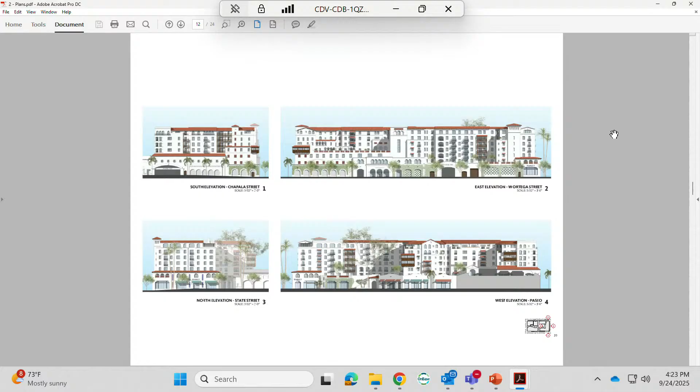Yeah, you have to meet your design, the units you need, yes. But like Chair Grumbine said, you guys are creative, you know how to do it. So anyway, with great gratitude and thanks for all the work, it's really fantastic to have something to respond to. So we have that now, and we can give feedback, and thank you.

For the record, we debated the Miradors until the wee hours of the morning. So now you got two opposite answers. Perfect, the debate goes on. Thanks.

A very quick general observation. I think Commissioner Lodge is 100% correct, and I believe the city attorney is 100% correct. And those are two incompatible positions. It's what this commission will be dealing with increasingly going forward in the future, because she's right and he's right. All right. But Commissioner Lenvig's wrong. Nobody heard him, so. That's right.

So I want to throw one more piece into this because it was tied to a thought on the poetry and soul comment, which is, I know our lawyers love us telling everyone to add more poetry and soul because it's such a great way of explaining exactly what to do.